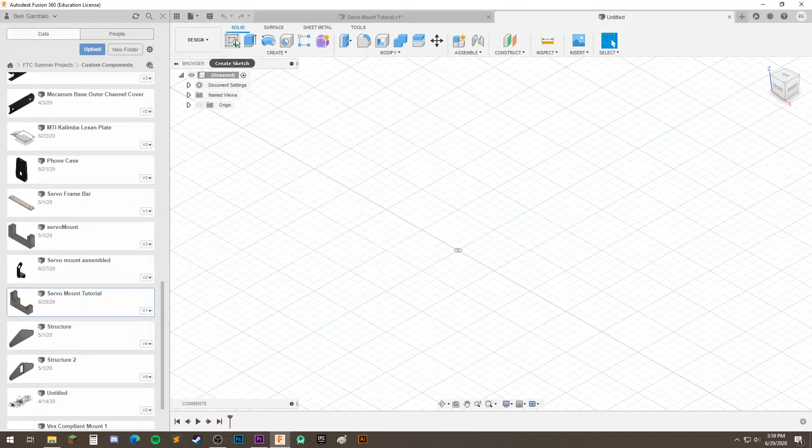So when you first come into Fusion, this is the home view of the work plane. What you want to do is come up here to this Create menu and click on Create Sketch, then select the plane that you want to work on, and then here we are.

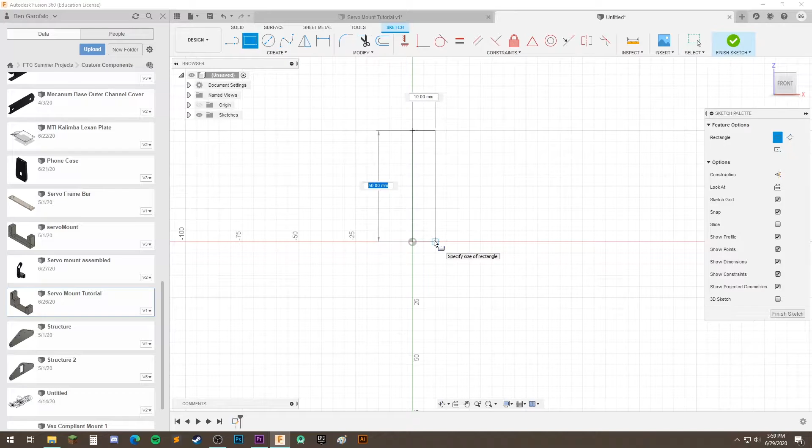So the first thing we want to do is use some basic shapes to create the body that we're going to extrude. Let's just use some rectangles to make our servo mount. Let's start up here for one, and let's make one right here, and let's make one right here.

So that's how you use the rectangle tool, and as you can see, I've already made the basic shape that's going to happen. This inner rectangle is going to become the hole where the servo sits.

So once you have all your rectangles laid out or your shapes laid out, they're all blue, which means that they are unconstrained and can move in any direction. So in order to actually dimension out what your 3D part is going to look like, you need to use the dimension tool and constraints.

This constraints menu has a bunch of constraints that'll help you gain control of your sketch and move things where they need to be. And this dimension tool is for sizing out parts of the sketch that correspond to real world measurements.

Like say this post, we're going to dimension it by selecting these 2 points, and then we're going to drag it up here, hit 10, because it's going to be 10 millimeters. But actually, before we do that, let's constrain these sketches to the origin. That way we can have just a little bit more organization here.

Once a sketch component, aka a line, is constrained, it turns black, and that means it just can't move from that point, whereas these blue lines, they can. So let's just start putting down some sketch dimensions.

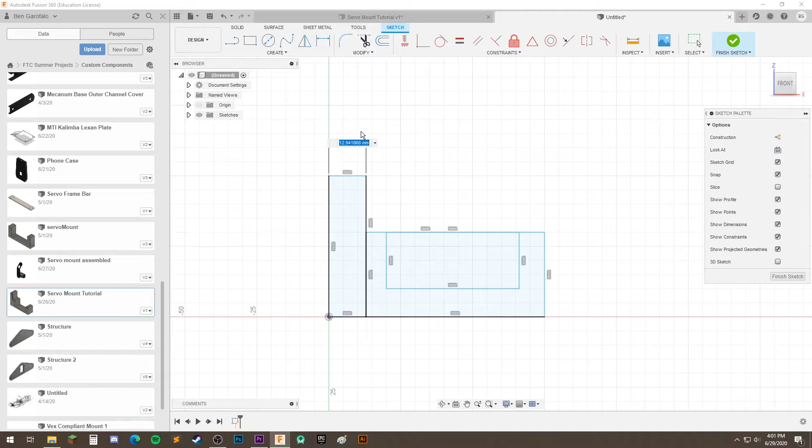I'll make that 10 millimeters, and you can see that line just became constrained. From this point to this point, this is going to need to be 40.3 long, okay? And this point to this point can be 28.

From this point to this point, we can be 4 millimeters. And this point to this point can be 10. And same thing over here, we're going to use dimension, make it 10.

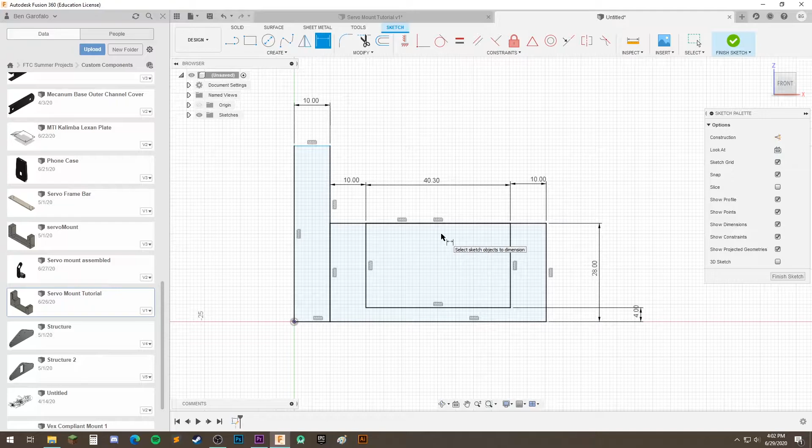Okay, so already our sketch is constrained with real-world dimensions. Now we're going to select the center diameter circle, and we're going to place some holes around our servo mount. These circles are going to turn into bolt holes, which we'll mount the servo with in real life.

So we've created some random circles. Now we need to make sure that they're in the right place. The way we do that is, again, using constraints. So first of all, let's create something that will help make life easier for us later on, and that is a construction line.

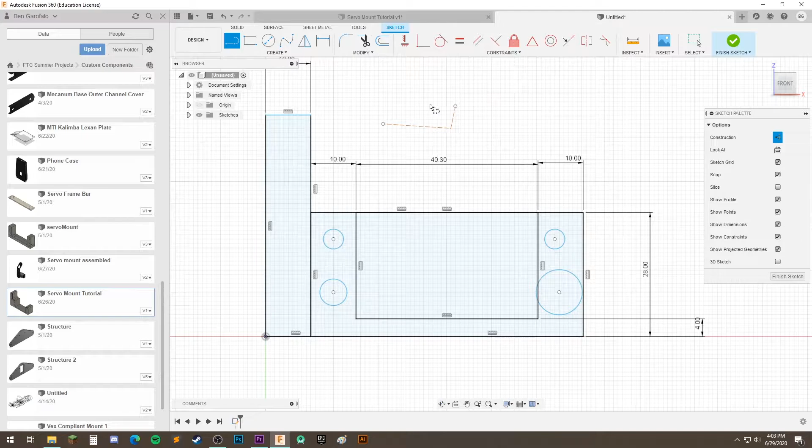So I've selected the line tool up here. And over here on the right sketch palette, you can check construction, or you can press X. That toggles it on or off. This basically creates a line that is just used for constraints and stuff. It doesn't actually have any effect on anything, it's just for making life easier when you're sketching.

Okay, so now let's take a construction line and put it between these 2 circles here. So one here, hit the check.

Now the next important constraint we want to go over is the horizontal vertical, and this just ensures that any lines that you want to be horizontal or vertical are actually that way. So let's hit it. As you can see, it moved straight up and down now.

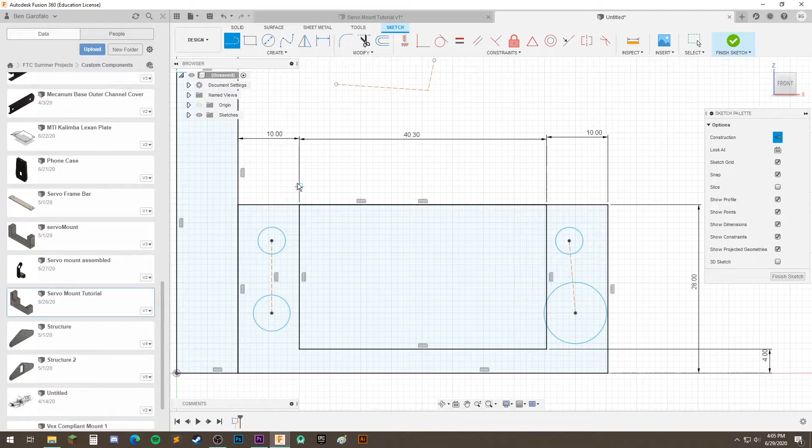And why don't we take an equals constraint, or actually, let's make another line between over here. So what we can do now is we can use this equals constraint, and we could transfer the properties of that line to this line.

Okay, another thing we want to dimension out is the diameter of these bolt holes, which are going to be 4 millimeters in diameter for each of them. So instead of changing each of them one by one, we're just going to change one.

So let's just select dimension, select this, go ahead up here, and I'll just put it right here, make it 4, exactly. So now this circle's dimensioned. And now let's use an equal constraint and put it on each of these circles.

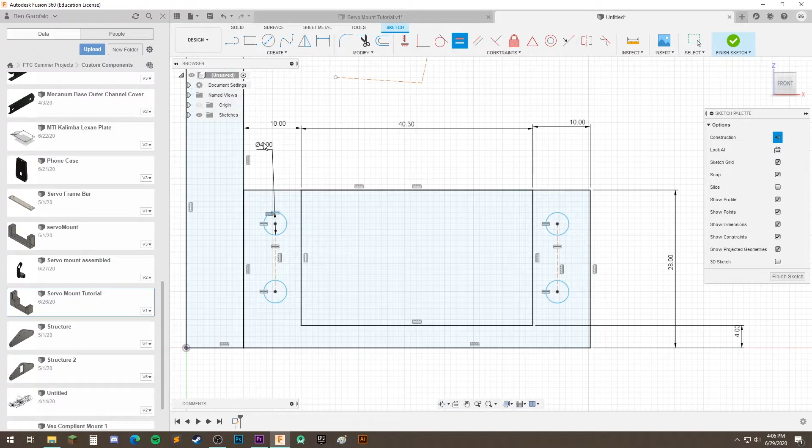Okay, so that means that whenever I change this dimension, all these corresponding circles will change, which is what we want.

Okay, and now we need to figure out where these circles go, because they can still move around all over the place. Let's first find out how far apart they need to be from each other, because as you can see, they're kind of all over the place.

Okay, so I just checked the measurements of the servo, and these circles need to be exactly 9.9.

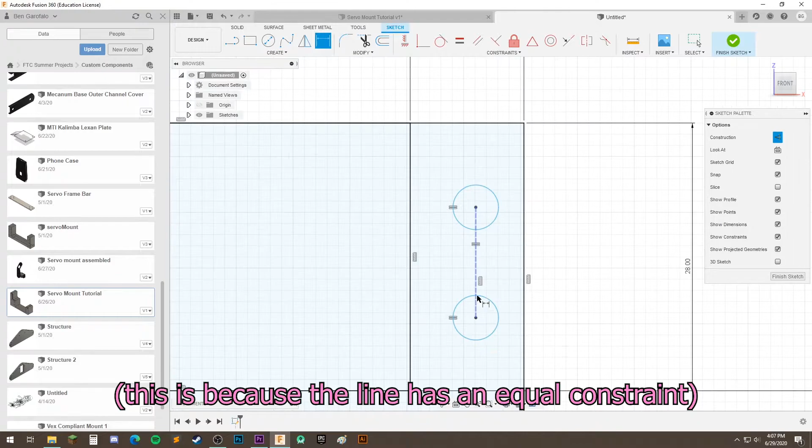And as you can see, this also changed. So now I can still move these circles around, but the distance between them won't change.

Okay, so the next thing we want to figure out is how far away from this inner edge do these holes need to be in order to mount correctly. When you're creating bolt holes to mount stuff onto, you want to make sure you check every single axis, because if you're off in one axis, you won't be able to mount it properly. So we've got to make sure it's constrained, not just to each other, but up and down.

How far is it from this edge? How far is it from this edge? How far is it from this edge? Etc. So it turns out it's 3.85 millimeters from this edge to this edge. So we can use the dimension tool, select the center of our circle, select the edge we want to constrain it to, and set it to 3.85, and as you can see, it moves over.

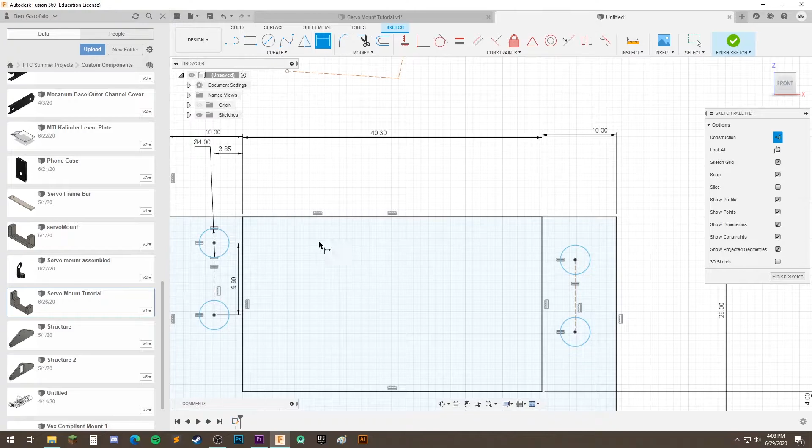We could also do this with a construction line, so we don't have to have 2 dimensions. In fact, let's do that. I'm going to delete this dimension. Instead, let's create a construction line from this point to this point. Bit hard to see. Let's hit the sketch dimension, and try to select this construction line. Okay, so now what we're able to do is copy this construction line over here.

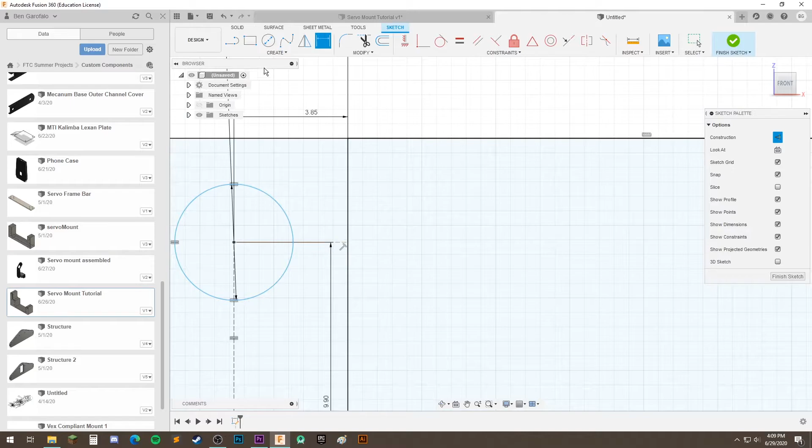By using an equal constraint. So let's go here, select equal, select this line, and make this the same size. Okay, so now they're perfectly aligned this way. They can only move up and down now.

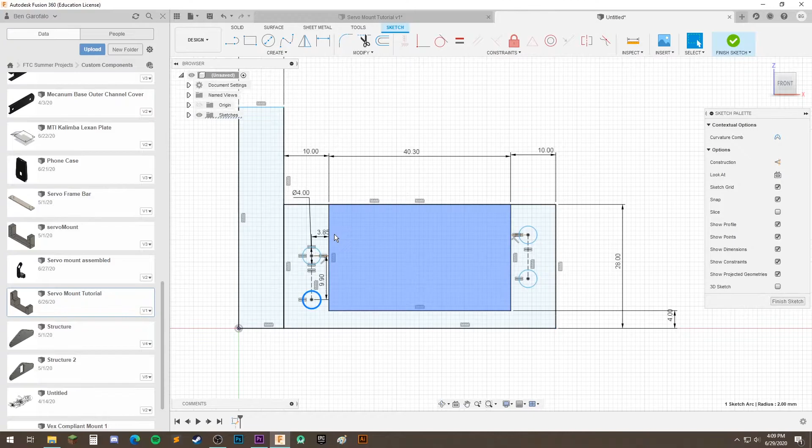Okay, so we're good in one dimension. They can no longer move side to side, and they can no longer move apart from each other, but they still can move up and down. So what we're going to want to do is constrain these bolt holes to the bottom of this, because if you think about it, if we constrain these holes to the top, they could end up having the servo float if it's off by like a millimeter or 2. So since the servo is going to rest at the bottom anyway, let's put the bolt holes, constrain them to this bottom part.

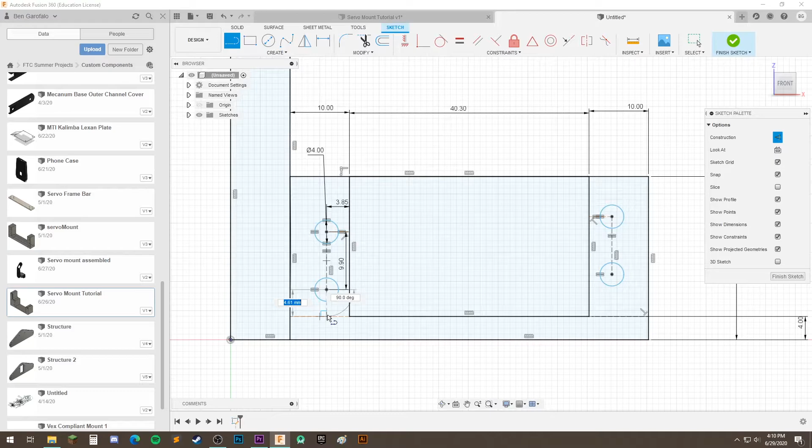Now the way we're going to do this is again by using a construction line from this bottom edge to that, and then similarly over here. Okay, now let's make a construction line from this bottom center point to this other construction line. And as you can see, it makes a perpendicular constraint. And again on this side.

Okay, now let's dimension this construction line, and this dimension is going to be 4.6. Let's make it equal using an equal constraint over here and over here. Okay, perfect.

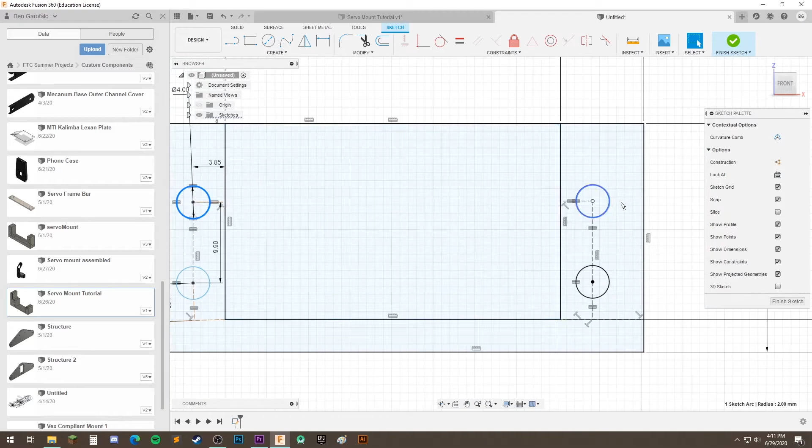So we've run into a problem. I noticed that over here, these circles turn black, which means they're now fully constrained in place. But these over here are not constrained, because as you can see, they can still move up and down as this changes, which means we need to constrain this construction line more.

So let's apply a horizontal constraint, and now the holes are in the perfect spot. And the last thing we want to do is add some more bolt holes.

So let's click our circle diameter tool and just make some. Oh, as you can see, it's a construction line, so I need to undo that. And over here, okay, so now it's a normal one.

And let's just add some holes that need to be mounted. In this case, I'm not going to use a construction line, because it's only in one place. But just for the sake of continuity, we're going to do it in case we want to add another bolt hole later. So it's just about convenience at this point.

Make sure the construction line is horizontal or vertical. Let's dimension one of these circles to be 4 millimeters. Okay, and then come up here, equals constraint, pop, pop, and let's just do some arbitrary dimensions.

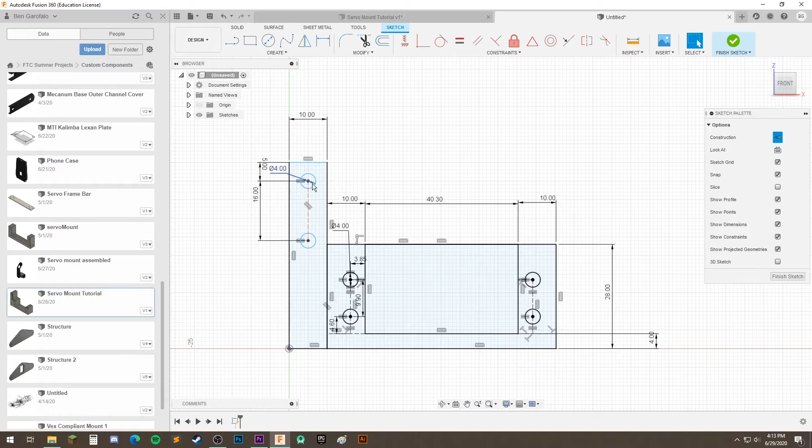We're going to give it a 5mm clearance. And we're going to make this line exactly 16. Now, we should be good. What you'll notice is that these can still move around, and that's because we haven't constrained them to the edge.

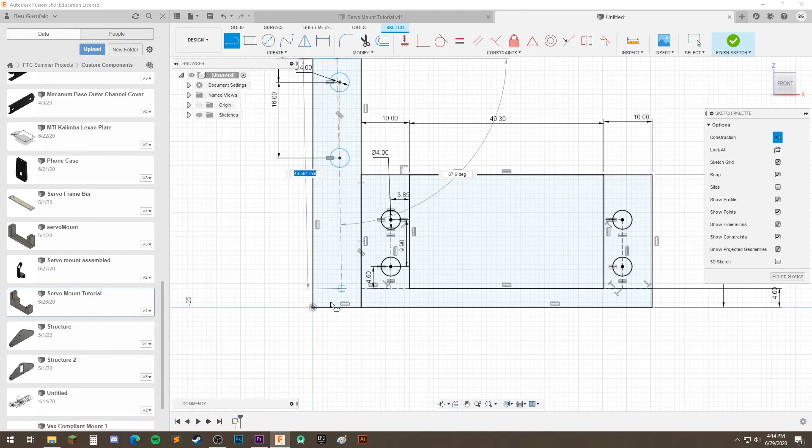So now let's dimension this circle to the edge. And what we can actually do instead, to get it perfectly centered, let's create another construction line. That triangle, when it shows up, snaps to that point, which means it's the center point. So we're just going to quickly create a center point all the way down, which might be helpful later.

And then we can either do a coincident, a collinear constraint. So let's just try the coincident, and put that on this line. As you can see, the circles can't move side to side any longer, but one thing they can do is move up and down, and that's just because this top line is blue.

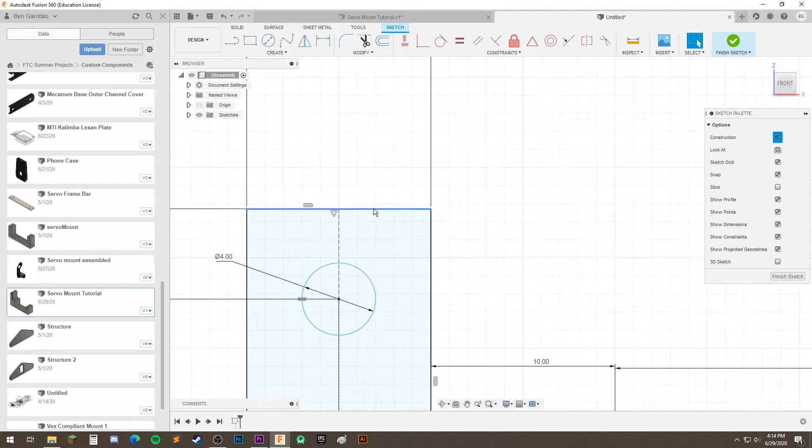So why don't we drag them down a bit? It's okay to leave a blue line. It doesn't really matter, but overall you want to have everything constrained so you know everything's in the right place. But in this case, this is an arbitrary length, so it doesn't really matter where it is.

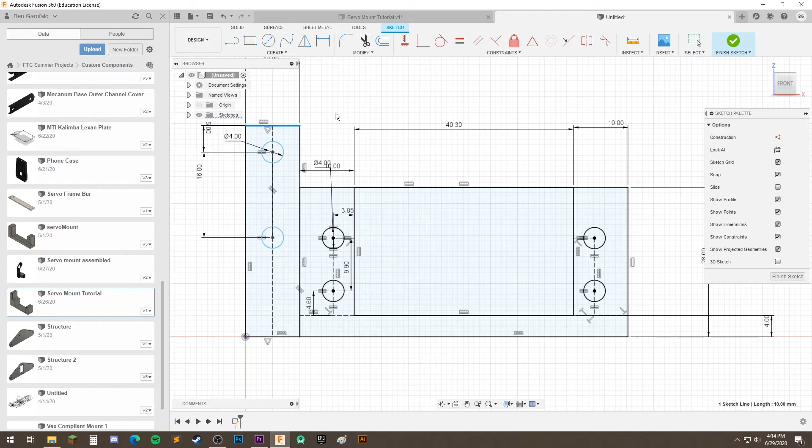Okay, now we're going to click Finish Sketch up here, and we'll return to our work plane. We're no longer in sketch mode because we have all these different tools up here. Let's go up here, select Front, and you can see that we just have a 2D shape right now.

And in our timeline, it shows we created our first sketch, so Servo mount. And the next step to making a 3D shape is to extrude our sketch.

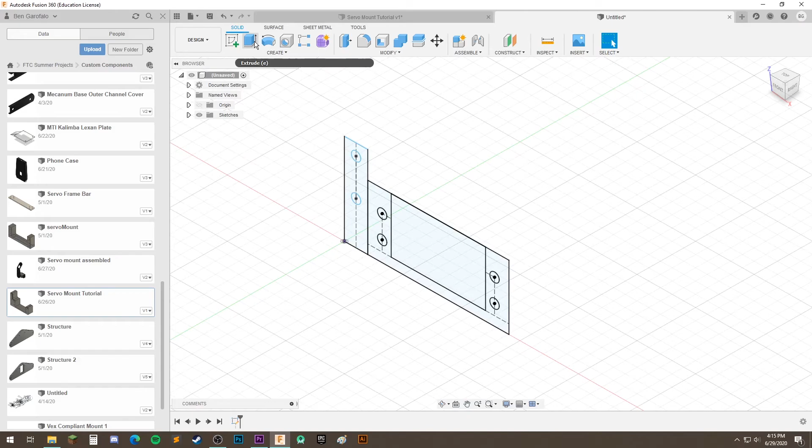So let's go ahead, select all the faces that we want to extrude, and then we can either drag this arrow or enter in a value. I'm going to enter in 19. So on our timeline, we added another extrude.

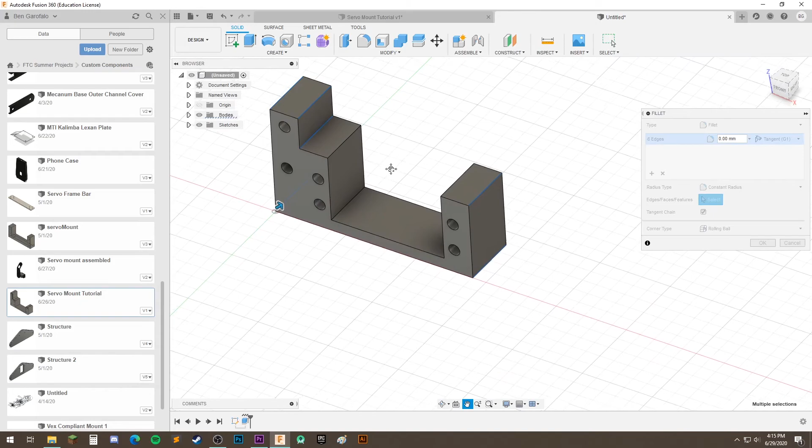The last step to creating a nice clean 3D form is to fillet the edges, which basically rounds any harsh corners that you don't want. So I'm going to select the corners that I don't want to be so sharp, and we're just going to round them slightly.

Another thing you can do, it's kind of personal preference, but it also removes sharp edges: select the outer edges and hit chamfer. Let's actually zoom in to do this one. As you can see, I just got it from the modify menu right here, and I'm just going to lightly chamfer the edges so it's not so harsh.

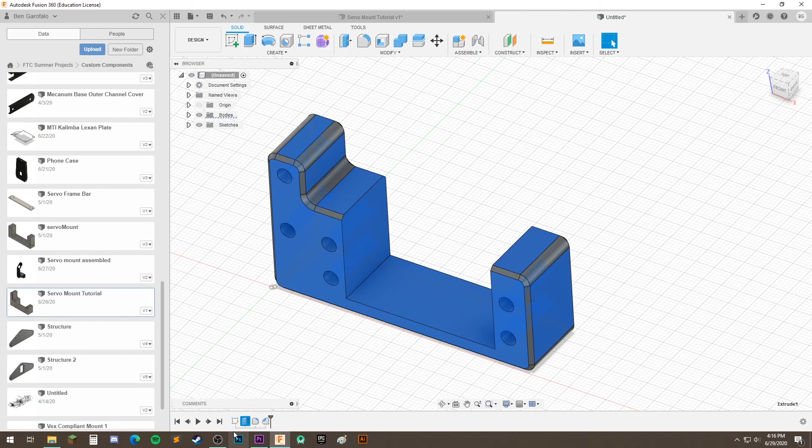And if I want to make a change to this, the best way to do it is to go back into the timeline and click Edit Feature, or just double click. And now we're back into our sketch menu, and we can add another circle.

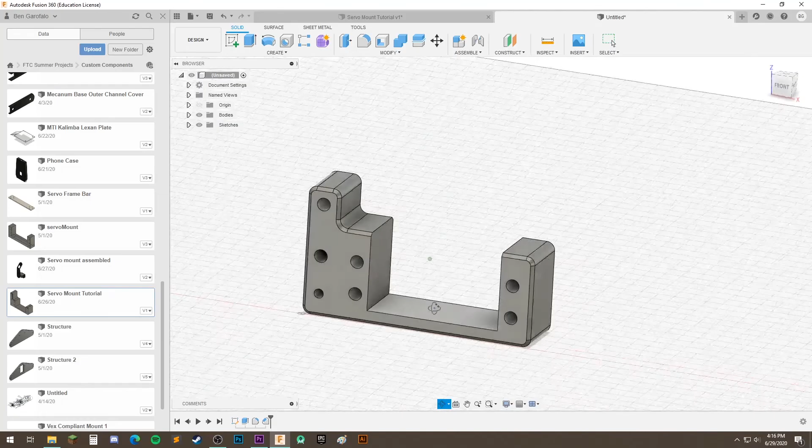Now you notice it doesn't show up. Well, that's because we haven't modified the extrude that we did previously. So let's go back into the extrude by double clicking, click on that, and you'll see that now it considers it part of the extrude.

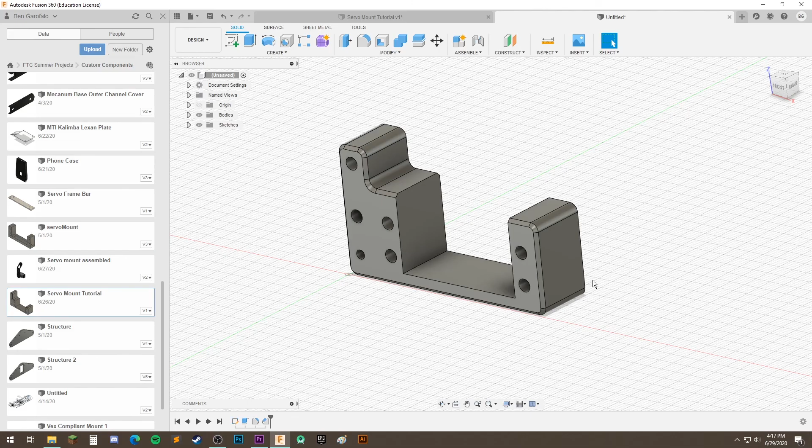So that's pretty much the extent of what you need to know. Of course, there are a bunch of videos going over all the sketch constraints and tools, which you should know. But basically, you just sketch a shape, go back to your 3D mode, extrude it, and then finalize by cleaning up stuff, maybe making it look nicer, and you're pretty much done.